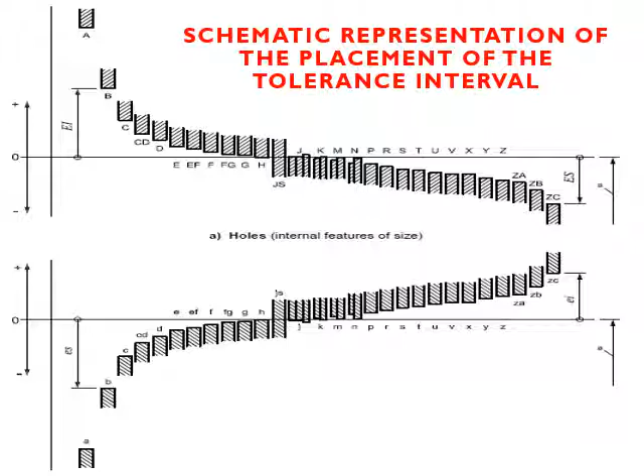That is nothing but the lower limit and upper limit of the shaft are lesser than the nominal size of the shafts, whereas the shafts denoted by J, K, M to ZC have the upper limit and lower limit greater than the nominal size, that is on the positive side with respect to its zero line. That is what this graph indicates, and we have to remember it while solving the problem.

For the grades of tolerance, generally a hole or shaft is denoted first by a number, followed by a letter, and next is again a tolerance grade. The first number indicates its nominal size; second is a letter, where a capital letter indicates a hole and a small letter indicates a shaft, and the letter itself indicates, as we discussed in the last slide, its fundamental deviation with respect to its zero line.

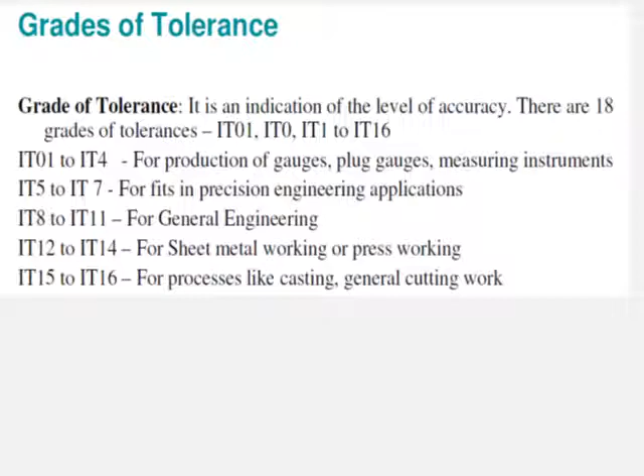Followed by that there is one more number which indicates its tolerance grade. For example, if it is indicated as 01, then its tolerance grade is IT01, whereas if it is 0, then its tolerance grade is IT0. If it is indicated like 10H8, 10 indicates its nominal size. H in capital letters is meant for a hole whose fundamental deviation is 0, and 8 indicates it's for general engineering applications, and its tolerance grade is IT8.

And then 10, I have mentioned. In which interval it falls we have to consider first to calculate the D value. It falls in the interval of 6 to 10. Generally this is a standard interval. Sometimes we may consider 45 to 65 mm, or in a different table it is 45 to 60, so it varies. So generally this is one standard table for nominal shaft size, and that interval is necessarily required to calculate further tolerance values.

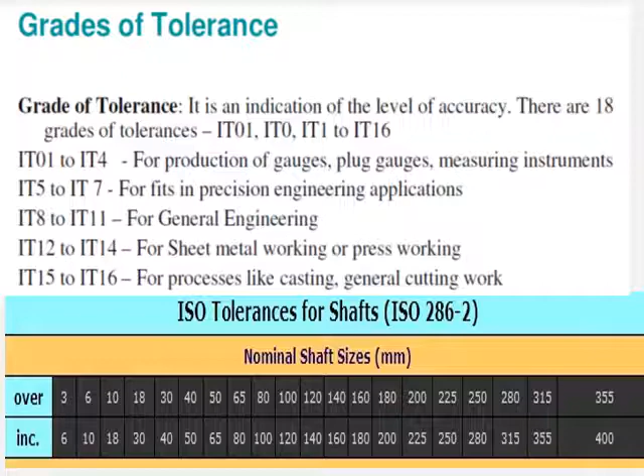Coming to the grades of tolerance, based on the tolerance grade we have to calculate; for example, IT8 is given by 25i. So we have to calculate i using the formula i = 0.45 ∛D + 0.001D. D we can calculate using the tolerance grade interval given in the last slide. If it is 45 mm, consider it as 30 to 50 mm. If it is 30 mm, 18 to 30. So in this range we have to consider the two successive numbers in which the given nominal size falls.

Then considering those two intervals, calculate the geometric mean. For example, 30 and 50. Your geometric mean is calculated as the square root of the successive numbers; in this case, the square root of 30 multiplied by 50. That is how we calculate the geometric mean of those two numbers. Once D is calculated, substitute it in the standard tolerance formula and obtain i.

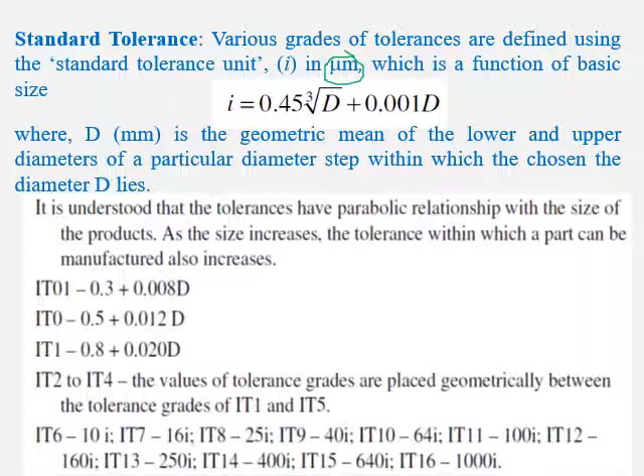It is always I which is obtained using this formula. Its unit is in terms of microns. Please concentrate here. Whatever the I value which is obtained using this formula, it has units in terms of microns. Once the I value is calculated, substitute it and calculate the standard tolerance. That is the important procedure.

And calculating the fundamental deviations for a different hole or a shaft. Here it is mentioned for shaft. So let us say with the shaft C, its fundamental deviation lies below the zero line, and it is given by minus 52 into d raised to 0.2. D we calculate as the geometric mean of the tolerance interval. So once d is calculated, calculate the fundamental deviation.

This fundamental deviation has to be added to the basic size of the shaft. Once fundamental deviation is added to the basic size of the shaft, we will get the upper limit. So this is how we calculate the upper limit of the shaft. Similarly, for the holes also, we have to calculate the fundamental deviation, and that has to be added to the basic size of the hole, so that we can get the lower limit of the hole.

Whether the hole or a shaft, it is indicated by a number followed by an alphabet. That alphabet indicates which fundamental deviation the hole or shaft is designed with. So this letter also indicates the fundamental deviation. For example, for a shaft designation A, its fundamental deviation is minus 3.5 d; B has a different value. If it is F, minus 5.5 d raised to 0.41; like that, fundamental deviation can be calculated using that formula.

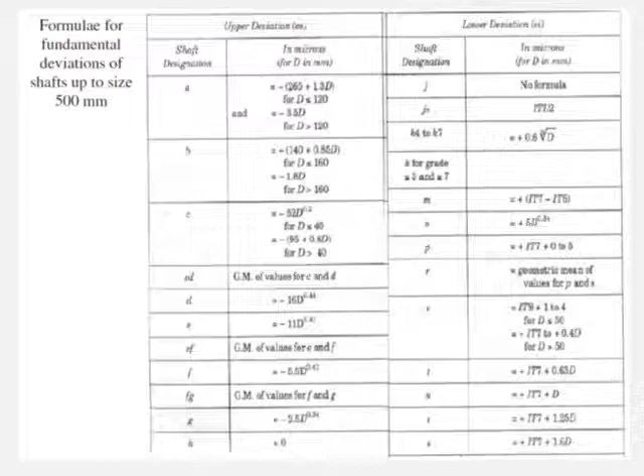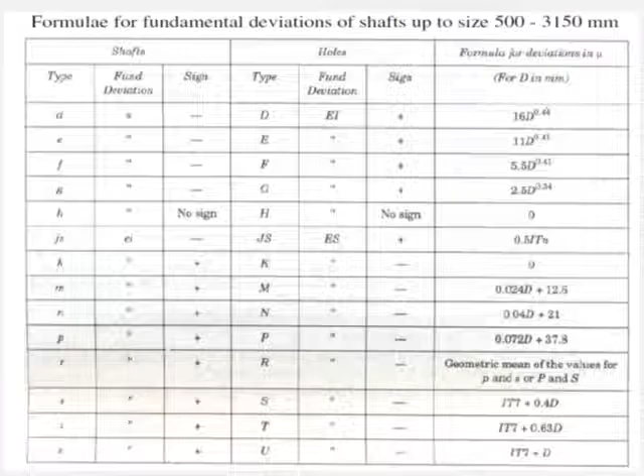So that was for the dimensions less than 500 mm. This is for the dimensions over 500 to 3150 mm. So that is how we calculate the fundamental deviation for a shaft or a hole. Further, let us go with the problem.

Calculate the limits for the hole of size 45 H8, diameter step 30 to 50 mm. Here the tolerance interval is 30 to 50. The hole is given by 45; 45 indicates its nominal size. The diameter interval is 30 to 50 mm. It is denoted by the letter H, so fundamental deviation for the hole H is 0 according to the table, and 8 indicates its tolerance grade. So it is IT8.

So first let us calculate the d value. Always the first important thing is to calculate d. d is the geometric mean of this tolerance interval, so d is equal to the square root of 30 multiplied by 50, which is 38.7298 mm. Now let us calculate I. As per the formula, I is equal to 0.45 into cube root of d plus 0.001 d. Substituting the d value, we get I as 1.5612 microns. Converting to mm, it is 0.0015612 mm.

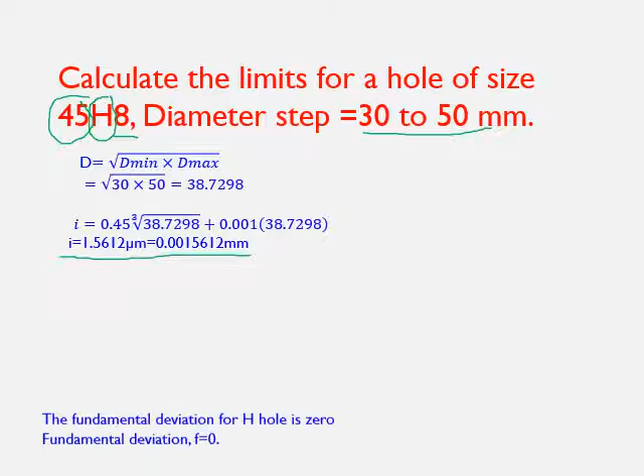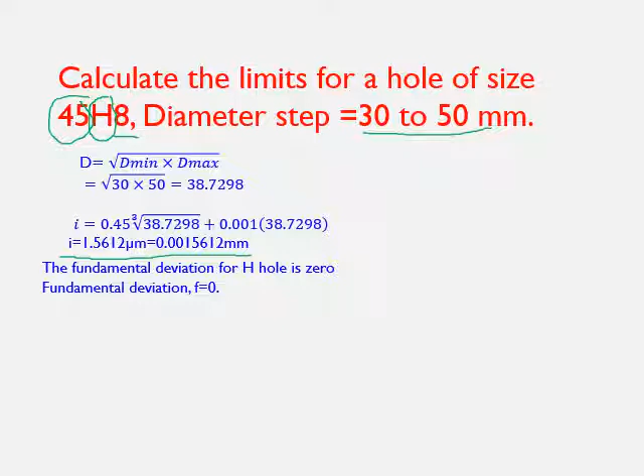Fundamental deviation for the H hole is 0 as per the table and diagram. For a hole, the lower limit is given by basic size plus fundamental deviation. Basic size is 45 mm, and it is an H fundamental hole, so the fundamental deviation is 0. So 45 plus 0, which is 45 mm.

Now let us calculate the upper limit of the hole. For that we need the standard tolerance value of the hole. Standard tolerance for IT8 is given by 25 times I. So 25 into 0.0015612 mm gives a standard tolerance of 0.03903 mm. That value we have to add to the lower limit of the hole.

So upper limit of the hole is lower limit plus standard tolerance, which is 45 mm plus 0.03903, or 45.03903 mm. So concluding, for a hole 45 H8, the limits lie between 45 mm and 45.03903 mm.

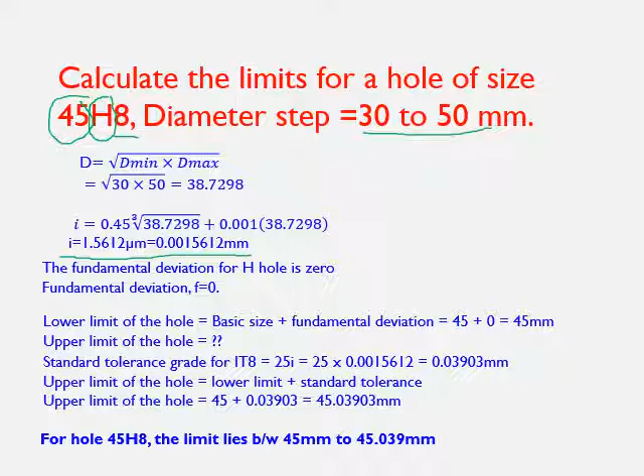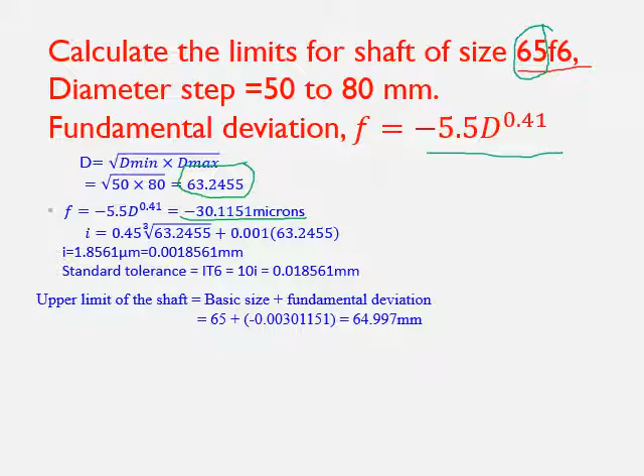In case of a hole, the lower limit of the hole is equal to basic size plus fundamental deviation, whereas in case of a shaft, the upper limit is given as basic size plus fundamental deviation. Here the basic size of the shaft in the given problem is 65 mm, plus the fundamental deviation we have calculated already, which is minus 30.1151 microns or minus 0.0301151 mm. So 65 minus 0.0301151, which can be approximated as 64.997 mm. That is the upper limit of the shaft.

Now the lower limit of the shaft is given by the upper limit of the shaft minus the standard tolerance, whereas for the hole, the lower limit of the hole was calculated as basic size plus fundamental deviation, and the upper limit of the hole was calculated as lower limit plus standard tolerance. So it is just the reverse in case of a shaft: the lower limit of the shaft is equal to the upper limit minus standard tolerance.

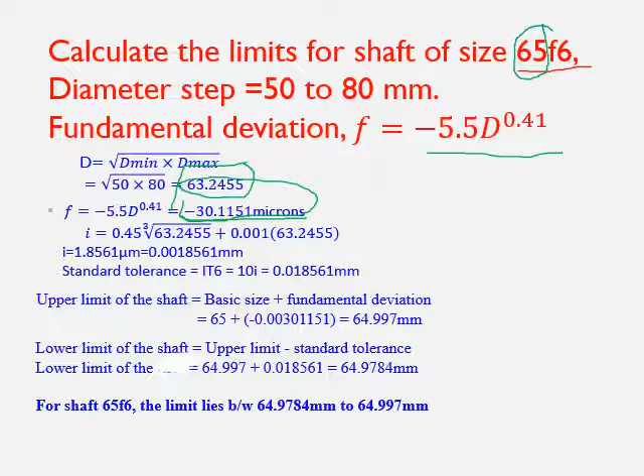So the inference of the problem or conclusion of this problem is, for a shaft size 65 f6, the limit lies between 64.9784 to 64.997 mm. That is how we have to calculate the upper limit and the lower limit for the shaft and a hole using fundamental deviation.

So next let us go with one unique numerical example. It is required to drill a hole of 30 mm nominal size with accuracy of plus or minus 0.02 mm by using a standard drill. A shaft is to be manufactured to obtain a clearance fit in the above hole with 0.01 mm allowance, and maximum clearance should not be more than 0.06 mm. Find the tolerance limit required on the shaft.

What are the given data? Let us go with that one. First, it is required to drill a hole of 30 mm nominal size. So 30 mm is the basic size of the hole which has to be drilled in a given component, whose limits are given as plus 0.02 and minus 0.02. A shaft is to be manufactured to obtain a clearance fit in the above hole, so the clearance should exist with the minimum allowance as 0.01 mm. So that has to be

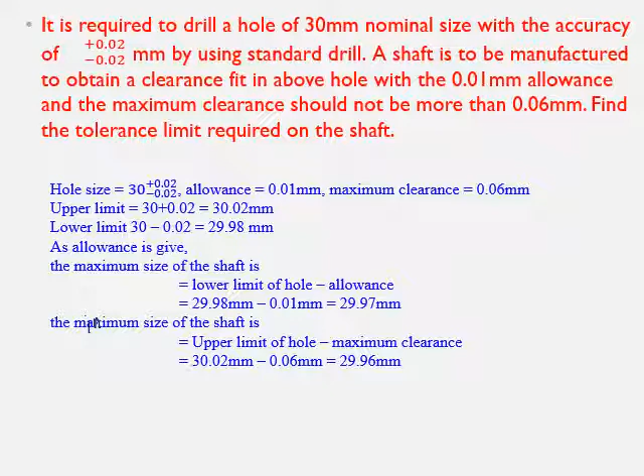Similarly, the minimum size of the shaft can be upper limit of the hole minus maximum clearance. Upper limit of the hole is 30.02 and maximum clearance, as per the given data, is 0.06 mm. So upper limit of the hole, 30.02, minus maximum clearance, the answer is

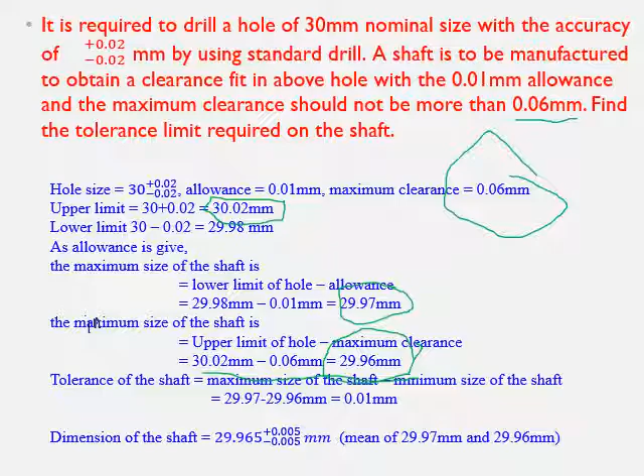29.96. So tolerance of the shaft is equal to maximum size of the shaft minus minimum size of the shaft. Maximum size is 29.97 whereas the minimum size is 29.96. So total tolerance of the shaft is 0.01 mm. So concluding, the dimension of the shaft is 29.965 plus or minus 0.005 mm, which is calculated as the mean.

So this concludes module 2 of mechanical measurements and metrology subject as per the syllabus.